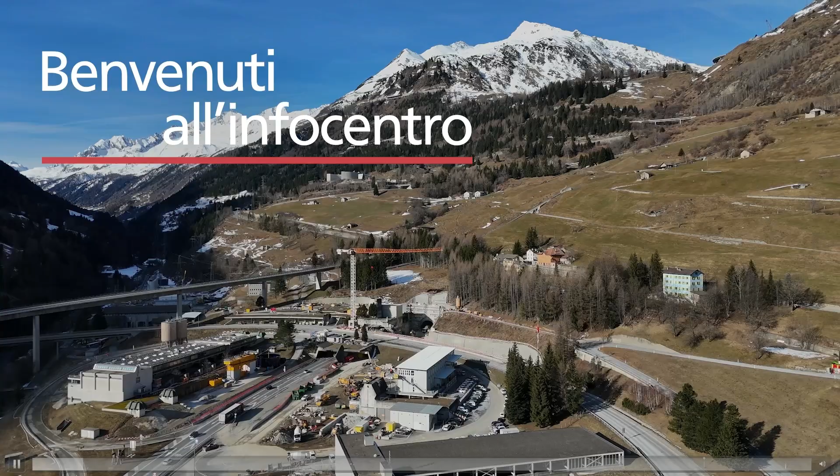Ladies and gentlemen, first of all, a few impressions of our construction sites in Göschenen and Airolo, where the second tube of the Gotthard Road tunnel is being built.

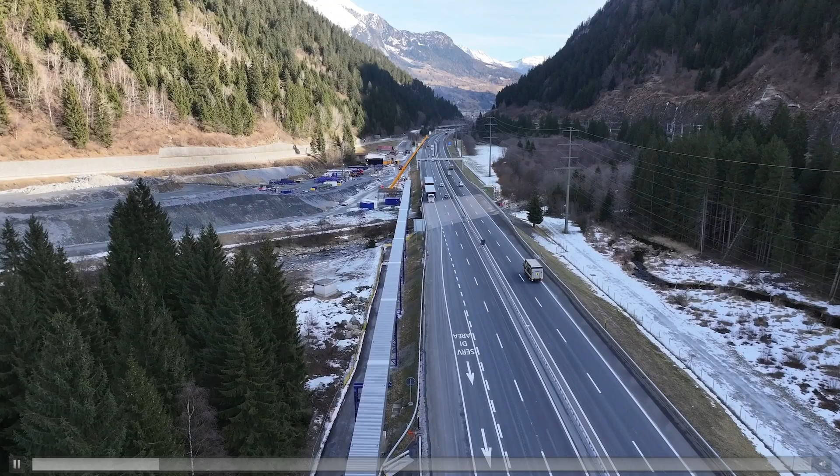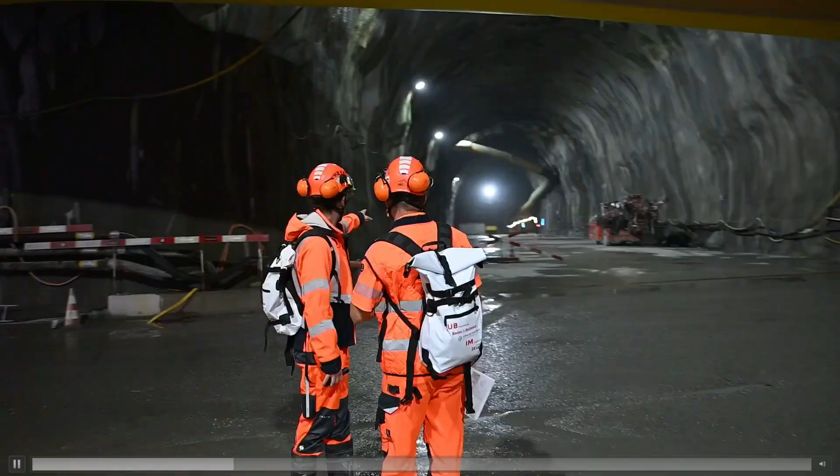Since our childhood, Alex said it, I know Alex. He went to the same high school as me. In the last years, our contact has become more intensive, and so one day Alex asked me if I would present my present tunnel project here at the Resources Day. What he didn't tell me was that I should do this in English.

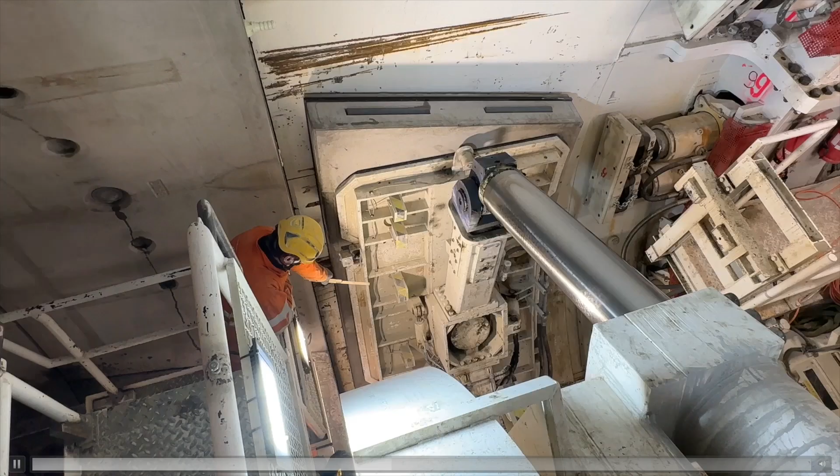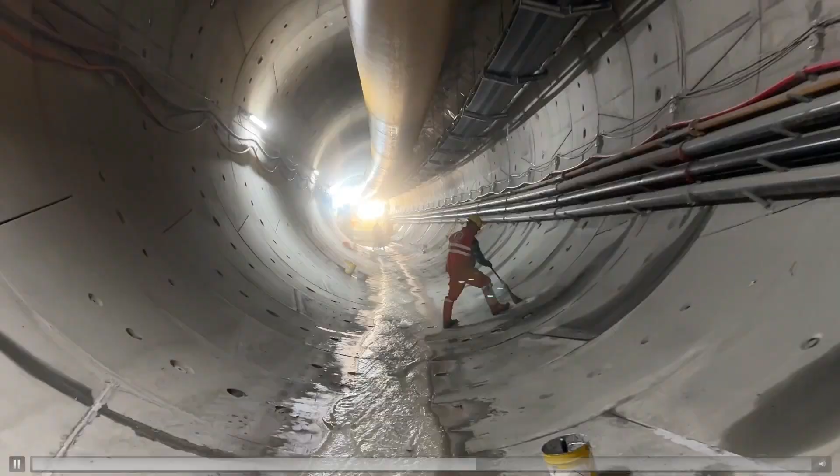You deal with stocks, with commodities, work with Excel spreadsheets all day, follow stock prices and earn a lot of money. So I decided to show you something completely different, the world of real work. Beside Excel sheets, charts and shareholders, I build infrastructure projects in a team. The best thing about my job is that we can see the progress of our work every day.

Let me shortly introduce myself. After high school, I studied civil engineering at the ETH Zürich. Since my studies, I worked for major Swiss engineering companies and was always part of the teams which built tunnels. I spoke too fast. This is Göschenen. So.

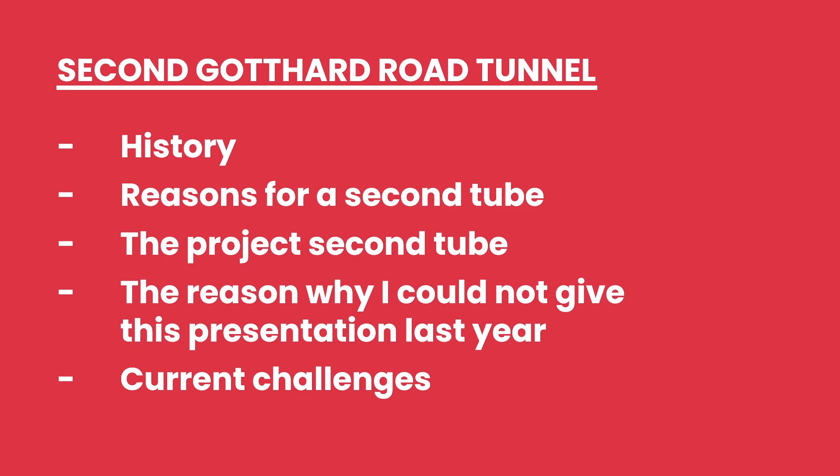Let's focus on the Gotthard and its traffic tunnels now. This is the structure of our presentation. A few words about the history of the traffic on the Gotthard route. Then the reasons for the second tube. Afterwards, I tell you something about the project second tube. Then the reasons why I could not give this presentation last year. And finally, our current challenges.

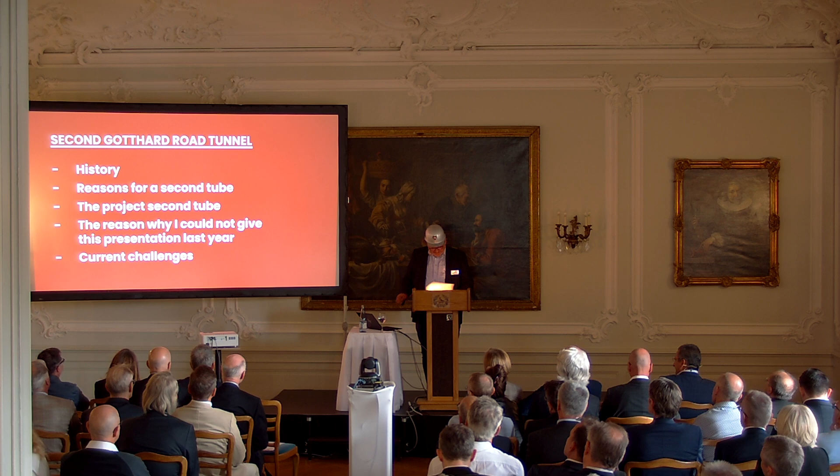As I mentioned, please excuse my poor English skills. I hope to be a better engineer than a master of English.

So back to the Gotthard. I won't tell you much about the history of the traffic over or through the Gotthard Pass. First as a mule trail, then horse-drawn carriages. You surely have already seen this iconic painting, the Gotthard Post by Rudolf Koller.

The realized project of a Transalpine rail link was significantly influenced by the politician and entrepreneur Alfred Escher. As you know, he was also the founder of the SKA, the later CS, Credit Suisse, the Swiss Re and ETH, and a lot more. A statue of him now stands on Zurich's Bahnhofplatz in front of the main station.

The work on the railway tunnel started in 1872, with the required ramps and loop tunnels between Erstfeld and Biasca being built in parallel. The breakthrough took place on 29 February 1880. The new Gotthard Railway was finally put into operation in 1882.

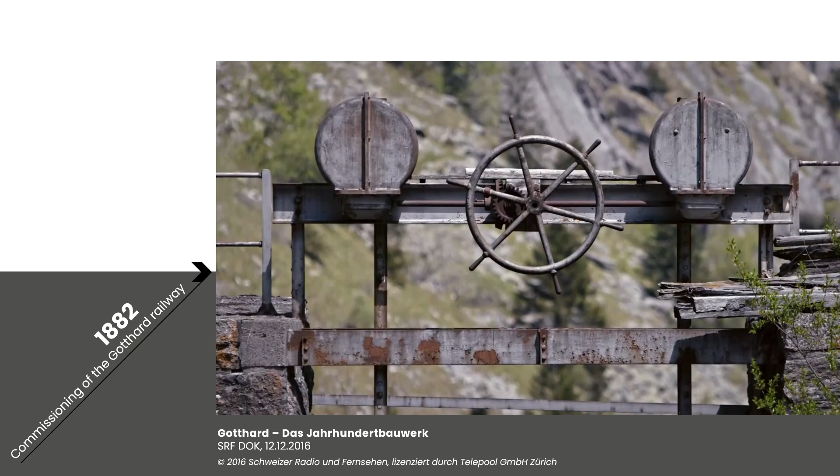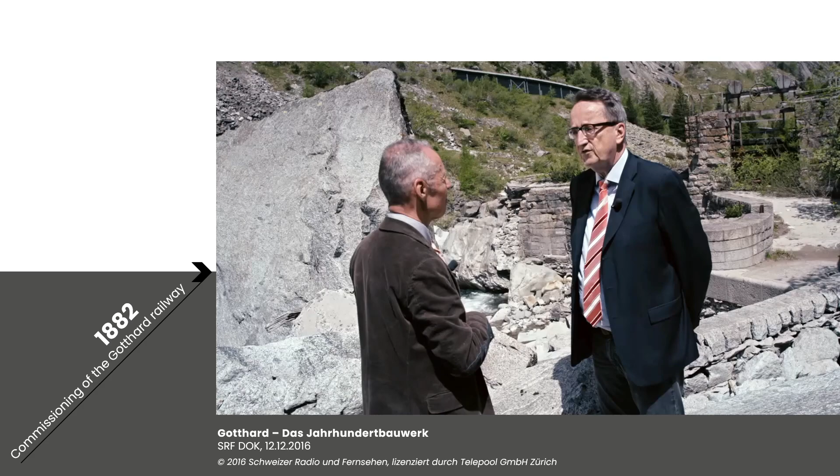The Gotthard Road Tunnel was opened in 1980. The Gotthard Road Tunnel runs from Göschenen in the canton of Uri at its northern portal to Airolo in Ticino to the south and is 16.9 kilometers in length below the St. Gotthard Pass, a major pass of the Alps.

At time of construction in 1980, it was the longest road tunnel in the world. It is currently the 5th longest. Although it is a motorway tunnel, it consists of only one bidirectional tube with 2 lanes. The Gotthard Road Tunnel provides a vital road link between northern and southern Switzerland.

Before its construction, the only direct route across the Alps was via the Gotthard Pass. The pass road culminates at 1,000 meters above the tunnel, at a height of 2,106 meters, and is only passable in summer. Due to severe weather conditions, such as heavy snowfall and avalanches, the pass is closed for about 6 months from November-December till May-June every year.

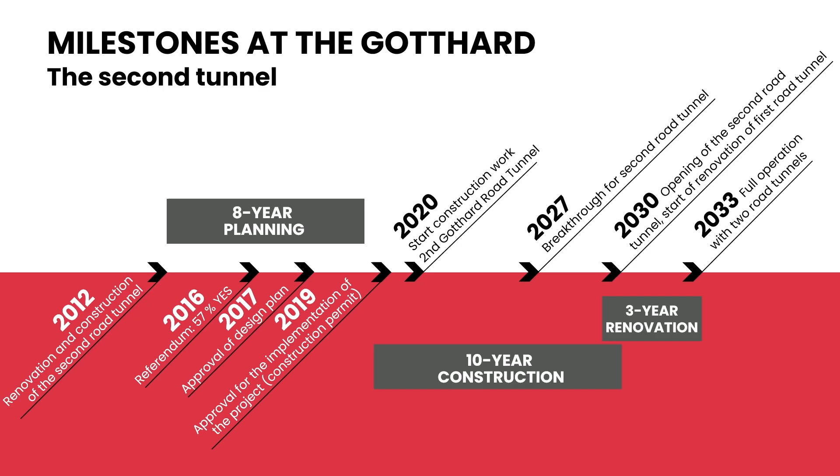After 40 years of use, the Gotthard Road Tunnel is in need of a comprehensive renovation. To ensure that the important road connection remains open during the renovation, the Federal Road Office, ASTRA, is right now building a second tunnel. It is expected to be operational from 2030. After that, the first tunnel will be renovated. Both tunnels will be available from 2033. The second tunnel will not increase the traffic capacity through the Gotthard. Only one lane will be open in each direction at all times.

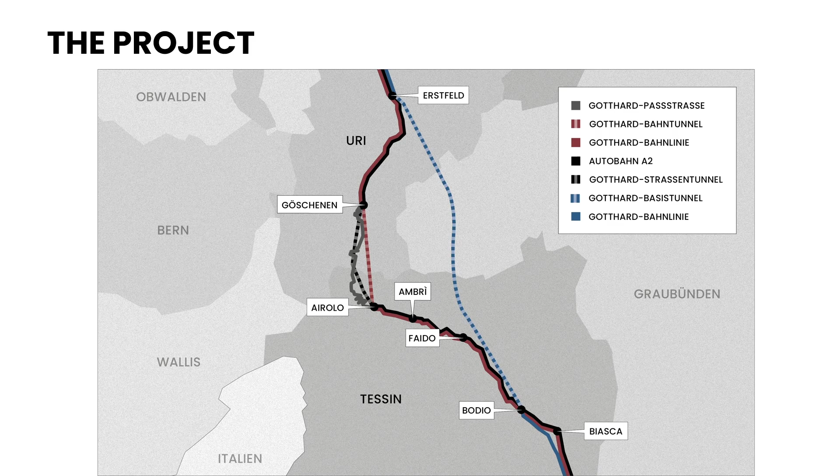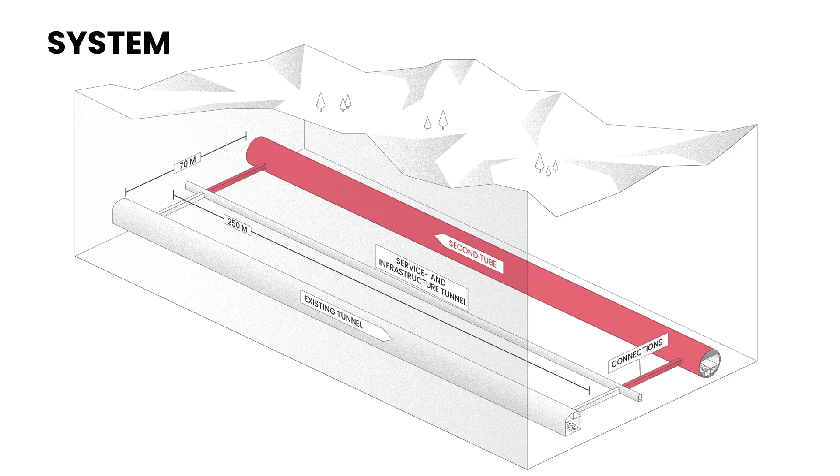The system: the second road tunnel is being built parallel to the existing road tunnel at a distance of 70 meters. Both road tunnels will be connected to the existing service and infrastructure tunnel, SISTO, which is used for maintenance purposes. Like the first road tunnel, the second road tunnel will be linked to the SISTO by 68 interconnections, each 250 meters apart.

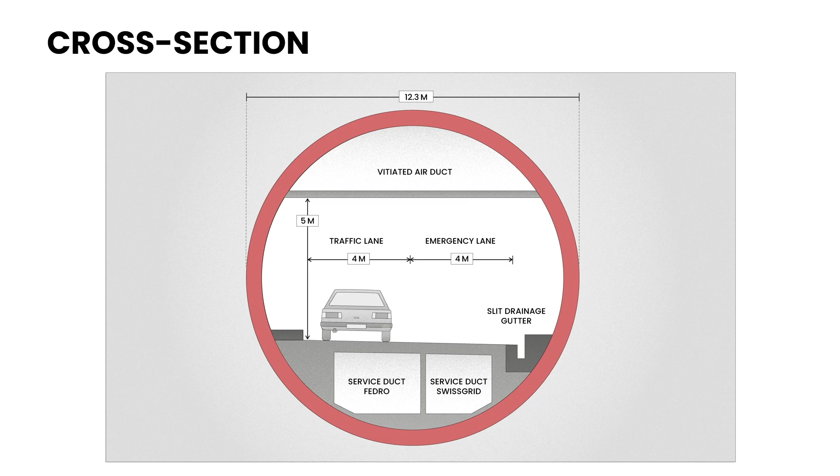The cross section. The new road tunnel will be similar to the existing road tunnel. It will have two lanes, with only the left lane being used at any one time after the first road tunnel has been renovated. The right lane in both tunnels will then serve as the hard shoulder. The service ducts situated beneath the carriageway will be different, however.

In the new road tunnel, all lines for electricity, communication and extinguishing water required for the maintenance of the tunnel will be installed in the left channel. The right channel provides space for third-party infrastructure. Swissgrid, for example, will move an ultra-high voltage line which currently runs over the Gotthard Pass into the tunnel.

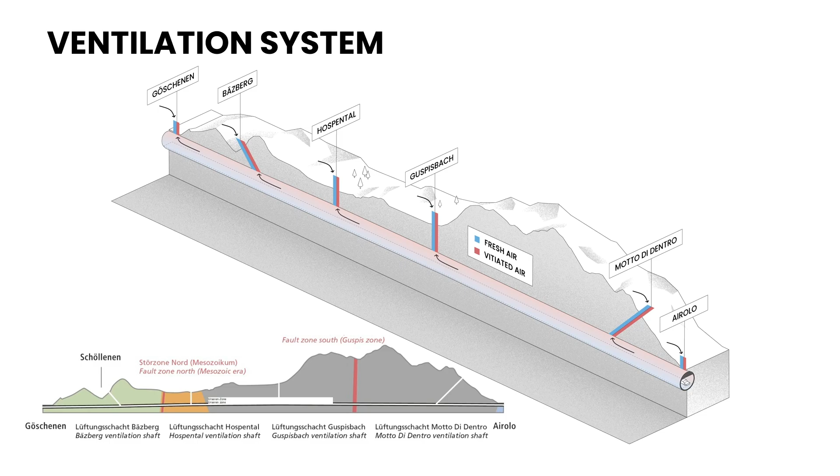Separated by a false ceiling, the ventilation duct for the removal of exhaust air is located above the road area. The duct leads to the underground ventilation centers, two of which are situated at the portals in Göschenen and Airolo, with four others distributed along the length of the tunnel and connecting to the existing ventilation shafts of the first road tunnel. In case of a fire, the fire ventilation system is activated, with smoke gases being extracted above the road area's false ceiling, making it possible to evacuate the tunnel users.

The majority of the second road tunnel will be drilled by the two TBMs, tunnel boring machines. Both the north and the south are home to an extensive geological fault zone. The northern zone is around 270 meters long and about 4.1 kilometers from the northern portal, and the southern fault zone is around 300 meters long and about 4.9 kilometers from the southern portal.

The tunnel boring machine is a single shield boring machine with a shield length of 10 meters. This is the white part in front of it. The TBM has a diameter of 12.3 meters. The drilling machine achieves up to 4.6 revolutions per minute and an average drill capacity of 2 meters per hour.

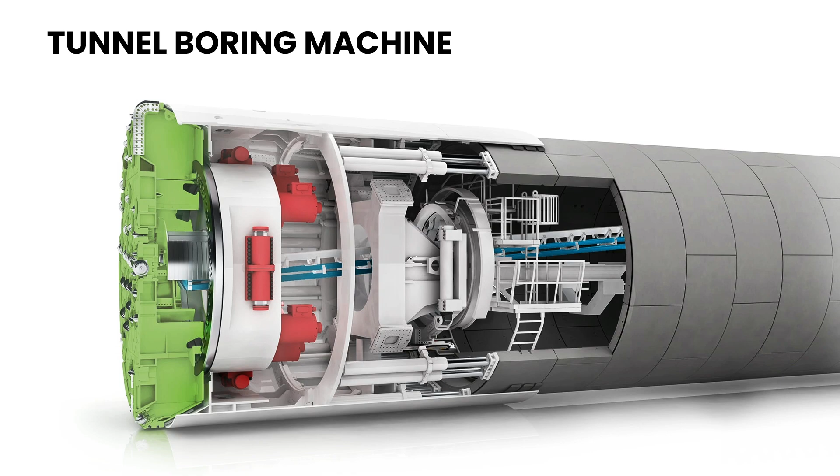One TBM will be developed from the north, with another working from the south. Launch tunnels will be built at both portals, where specialists will assemble the TBMs and prepare them for use. The fault zones cannot be drilled out by the TBMs and must therefore be blasted in advance. It is for this reason that 2 access tunnels will be drilled to these locations.

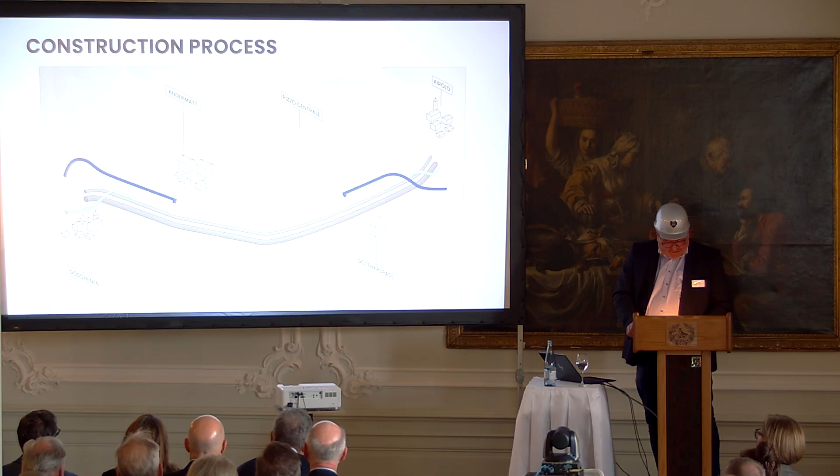The access tunnels in blue reach the 2 geological fault zones that have to be excavated by blasting before the tunnel boring machines can pass through. The heading for the main tunnel, here in red, will be delivered by 2 tunnel boring machines.

The 2 tunnel boring machines are currently being transported and assembled in front of the future tunnel. In the beginning of 2025, they will be placed in prepared launch tubes at the 2 tunnel portals where they finally start their work. They are expected to reach their destination in the summer of 2027. The breakthrough will take place pretty much in the middle of the tunnel.

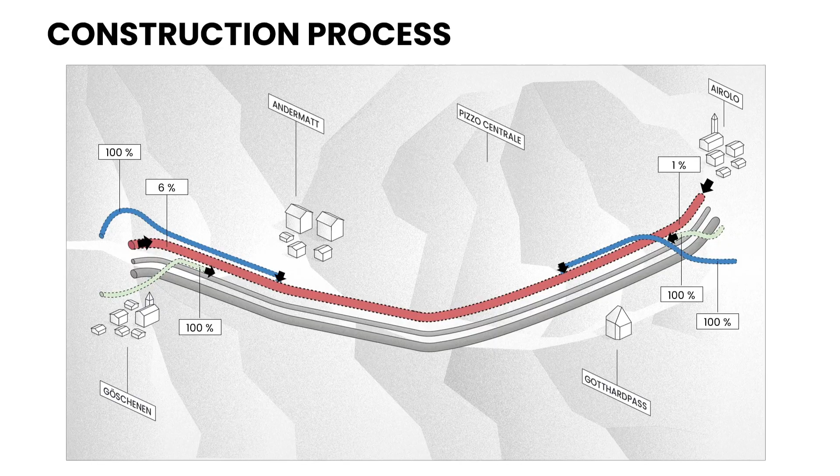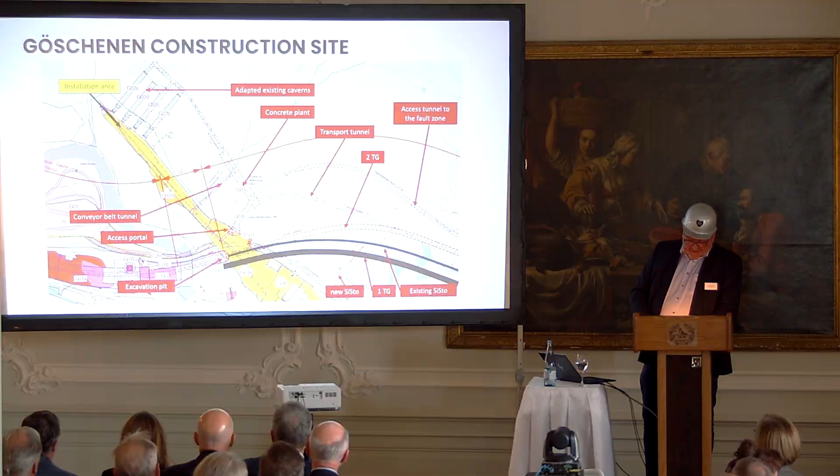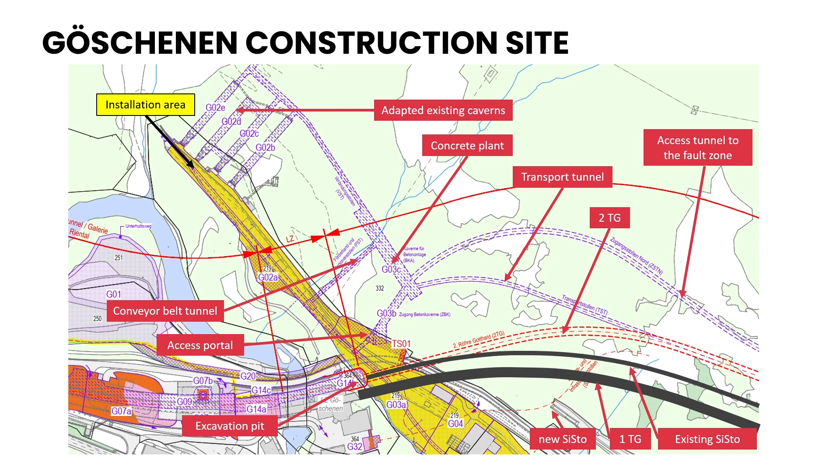On this slide, you can see the complexity of our construction site. It is impossible to explain everything to you in 20 minutes. The yellow area is our installation site. The thick black line is the existing first tube. The thin black line is the existing safety tunnel SiSto. This red line is the second tube, and all purple parts around here were only built for preparing the tunnel construction. The next slides show you some impressions of our work.

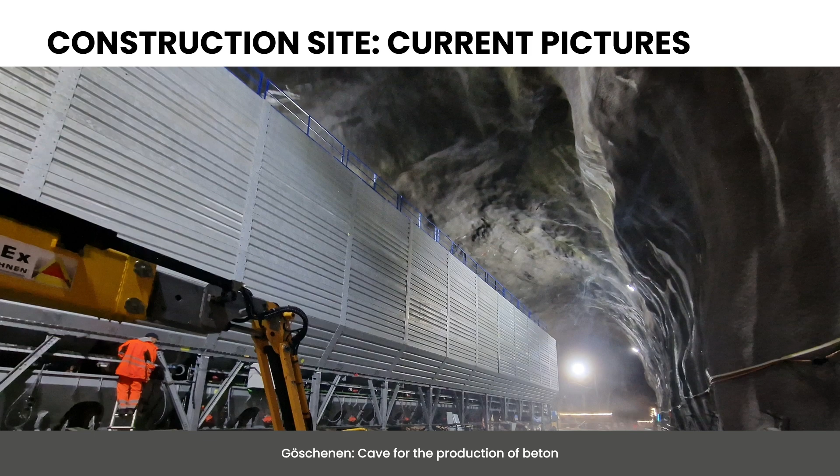Here you can see the concrete cavern. Concrete is produced here today already. The cavern is 140 meters long, 20 meters high, and 20 meters wide. The production plant is installed here. The aggregate and cement for the concrete are delivered by rail and transported from outside into the silos via the conveyor belt tunnel, which you can see here. It comes from the outside and delivers all the material.

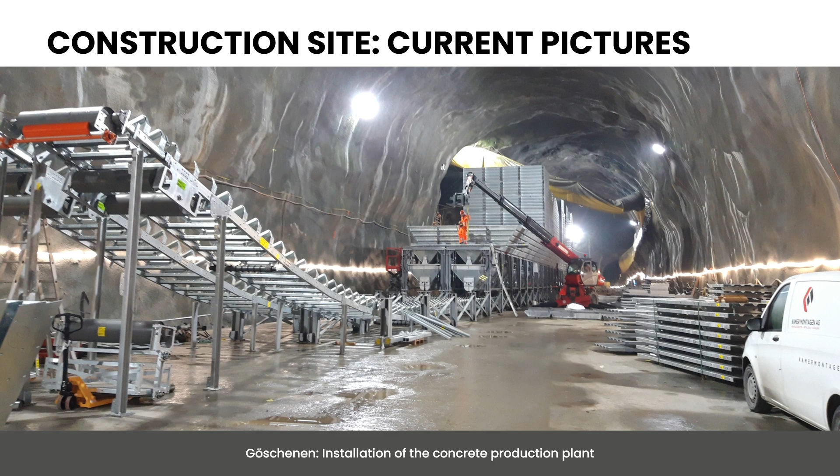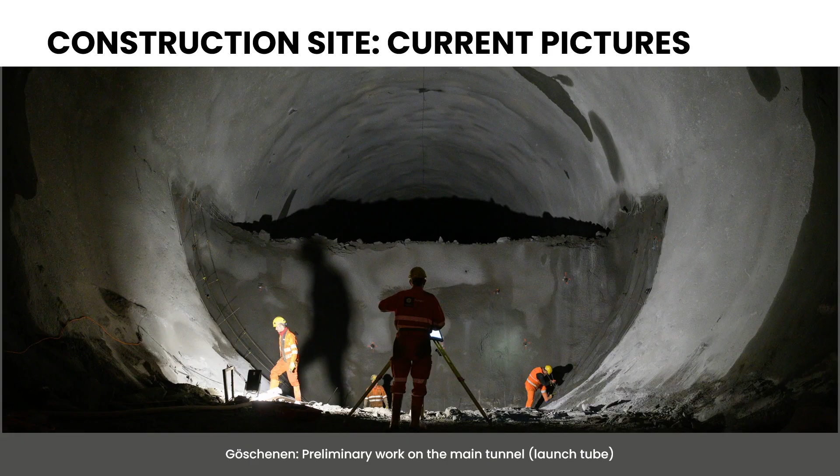In the area of the portal, we are breaking out the launch tube for the TBM. There's only little space in Göschenen, and so we have to finish assembling the TBM in the mountain. That's the launch tube.

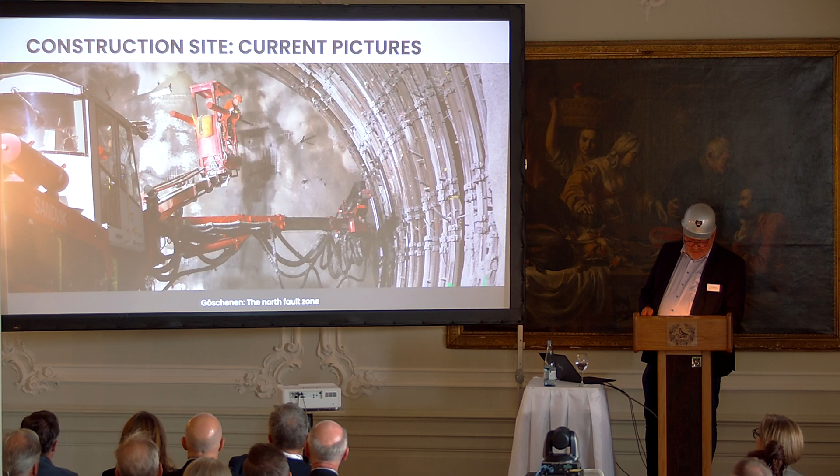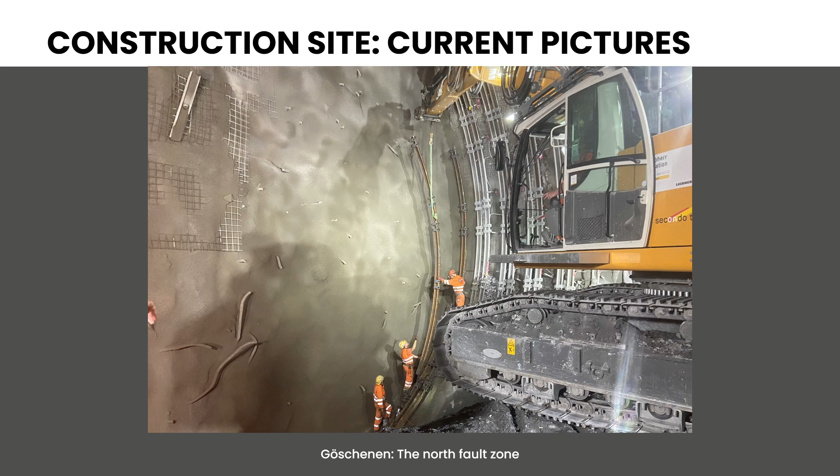2 months ago, we started excavating the fault zone. The excavation cross-section has a diameter of 15 meters. I have never seen such a large cross-section before. It's very impressive, as you can see here. The rock pressure in this zone is so strong that convergences of up to 1.4 meters can occur. And after the conventional excavation of the fault zone, the TBM, with its diameter of 12.3 meters, has to be pulled through this zone.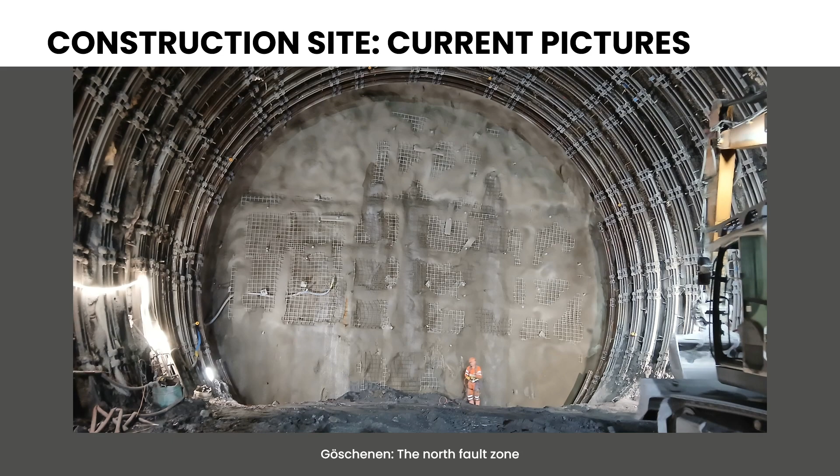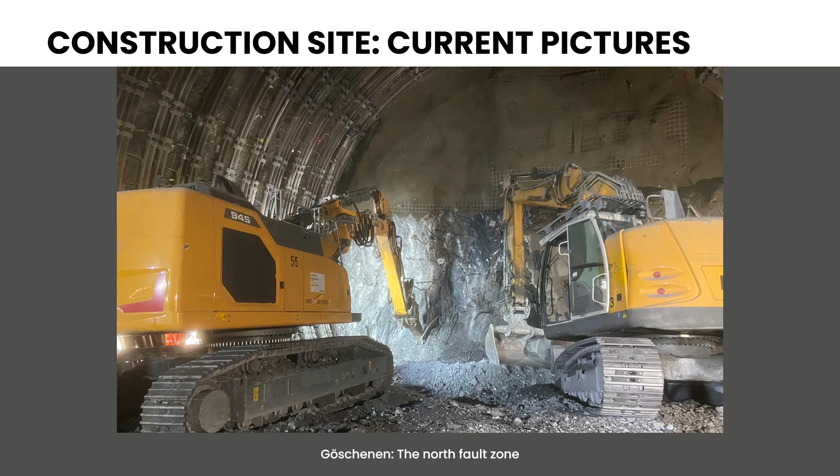The rock in the fault zone is so weak that an excavator is sufficient for the excavation. In this zone, many and strong supports made of steel and concrete are needed. Here, you don't have to blast, the excavator is enough.

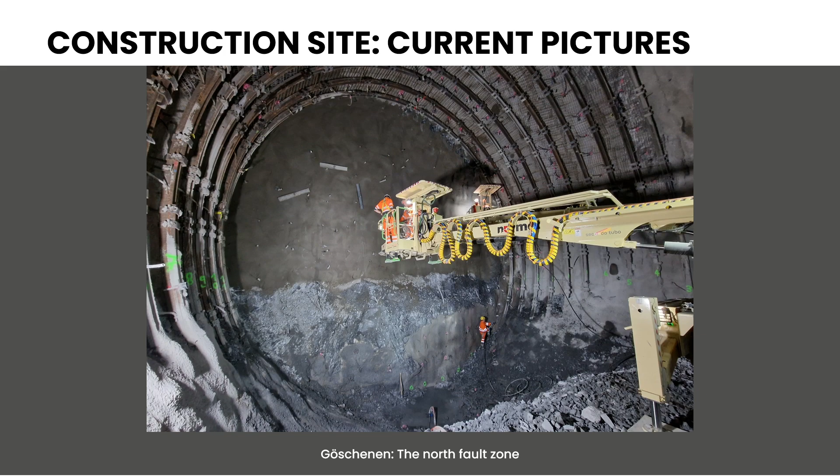It was granite. Well, it's still the fault zone. If you see the miner here, this is 15 meters, 15 meters. The altitude is so high that, as you told me, the excavator has to use a ramp because it cannot reach the top. Yeah, we have to build that in a few parts. As you saw in the video here, we open just a part of the whole area.

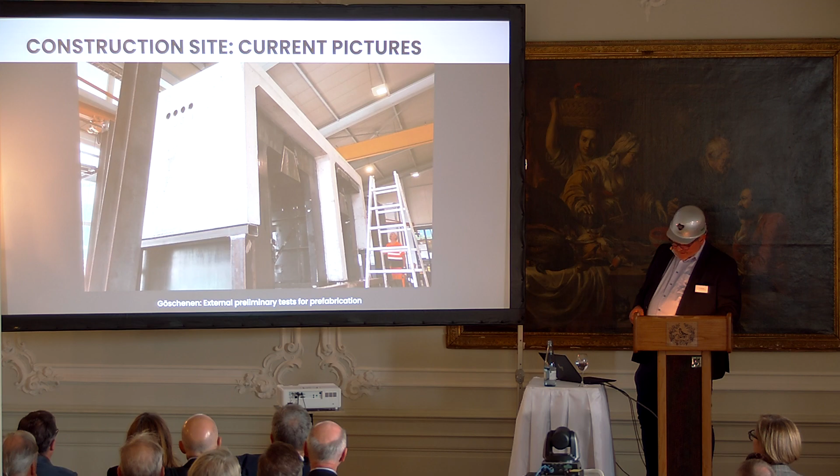We have adapted 4 old military caverns for our purposes and will use them to produce the precast concrete parts of the tunnel. The first tests have already taken place. Here you can see the excavation work for the construction pit. Much further down, the TBM will then start its work. Further down, the excavation pit had to be supported by these steel elements.

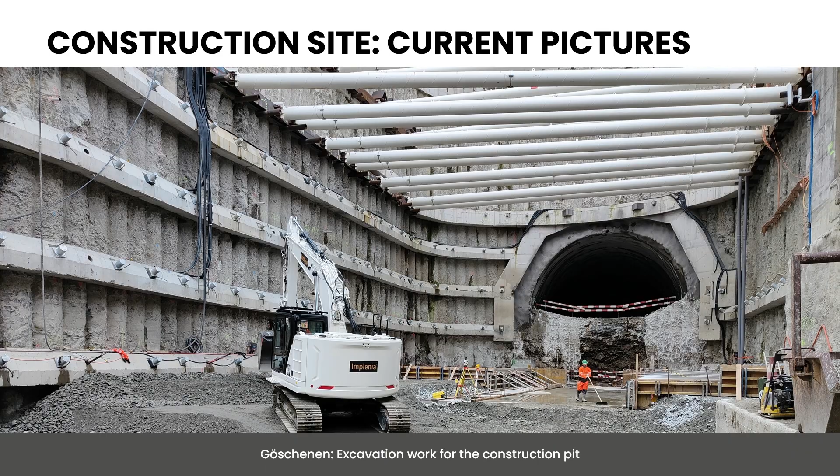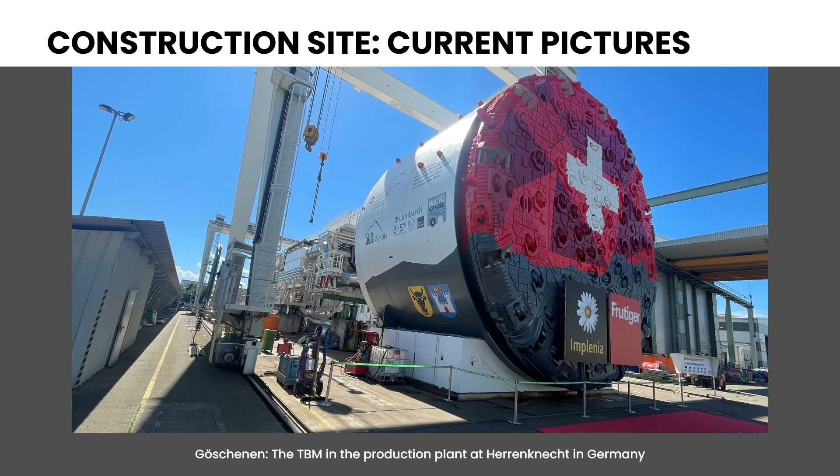Now, impressions of the production plant at Herrenknecht, where the TBM was planned and manufactured. This is in Germany, in the Schwarzwald, in Schwanau. The TBM was here to show the possibilities of the TBM, and we checked that. And after testing its capabilities, the TBM had to be dismantled again and transported to Göschenen.

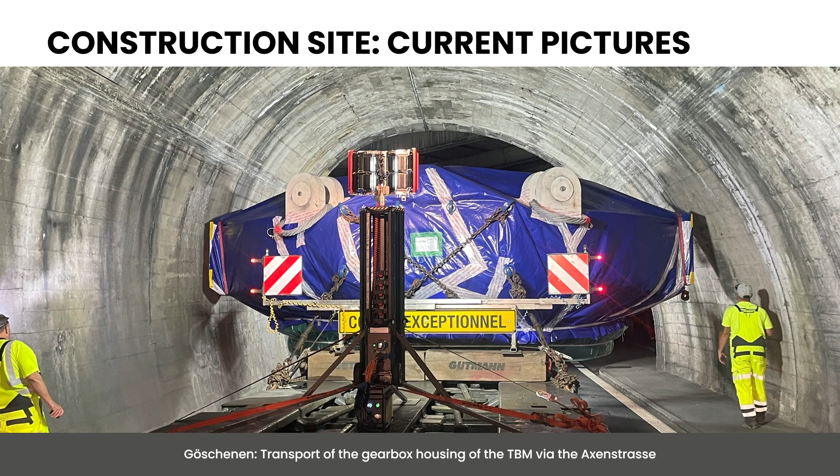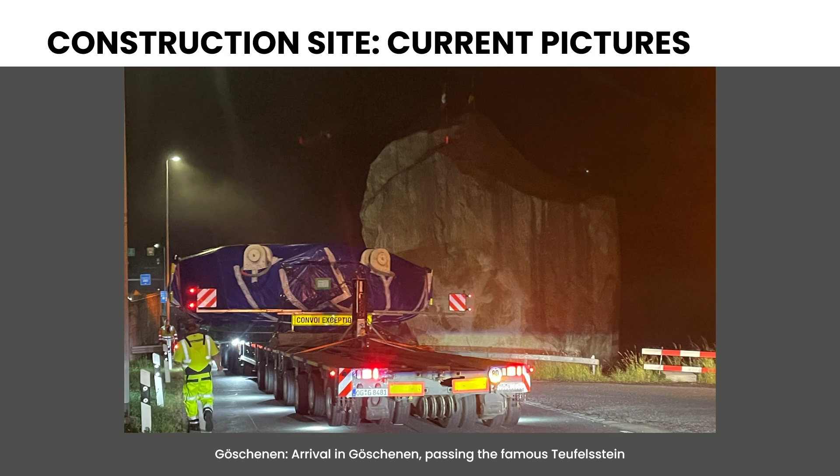On the Axenstrasse, this was challenging as well. Here you see an existing tunnel just in front of Sisikon on the Axenstrasse, and the part was 7.2 meters wide, and the tunnel was 7.35 meters. But finally, we arrived and passed the famous Teufelsstein here in the night. Right now, the drill head is being assembled and welded.

And now to the material we excavate. Around 3.5 million tons of rock material from the excavation of the second road tunnel is being transported by rail to Flüelen. Here it will be used for the renaturation of the shallow water zone at Lake Uri, which is part of Lake Lucerne.

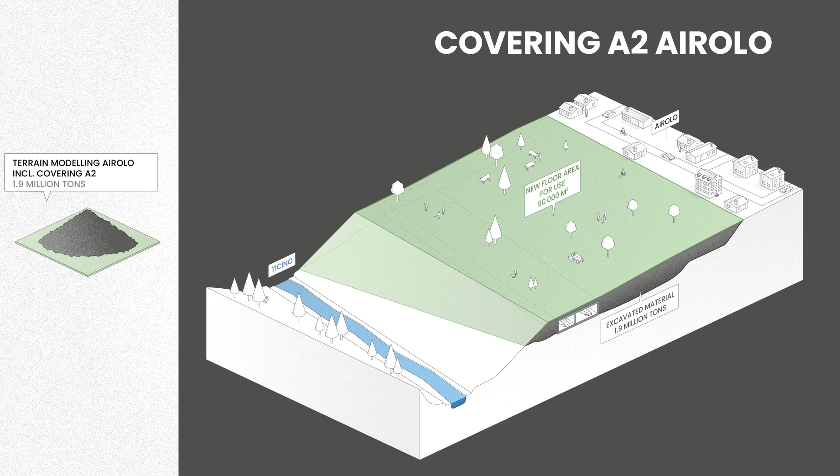We use 1.9 million tons of excavated material and construct a new motorway canopy in Airolo. Around 1.9 million tons of excavated material will be used as construct.

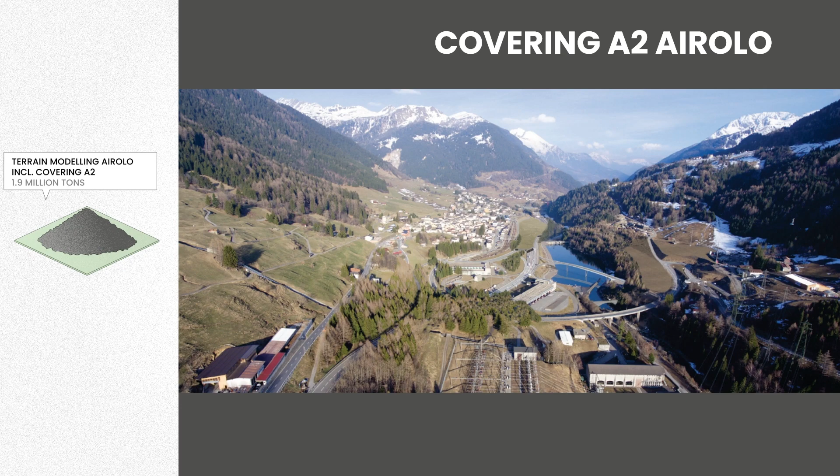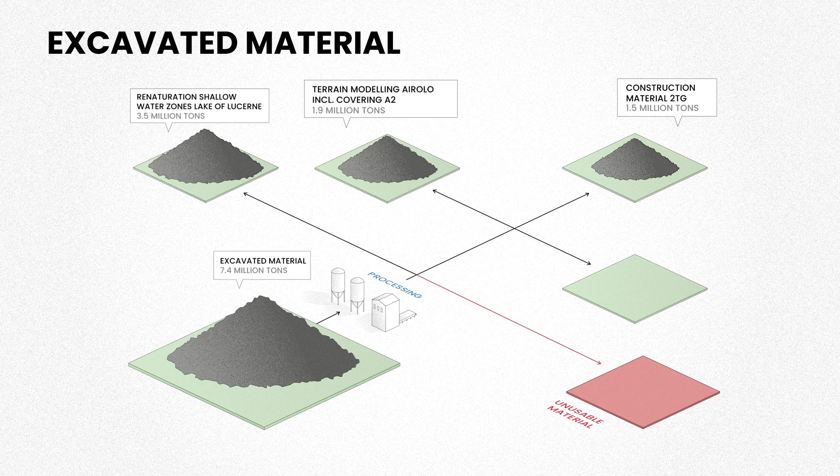This is Airolo. They will cover the A2 motorway here. And 1.8 million tons of excavated material will be used as construction material, with 1.5 million tons being used for the construction of the second road tunnel and 0.3 million tons for the renovation of the existing road tunnel. The material will be reduced in size and cleaned before being used as aggregate for concrete.

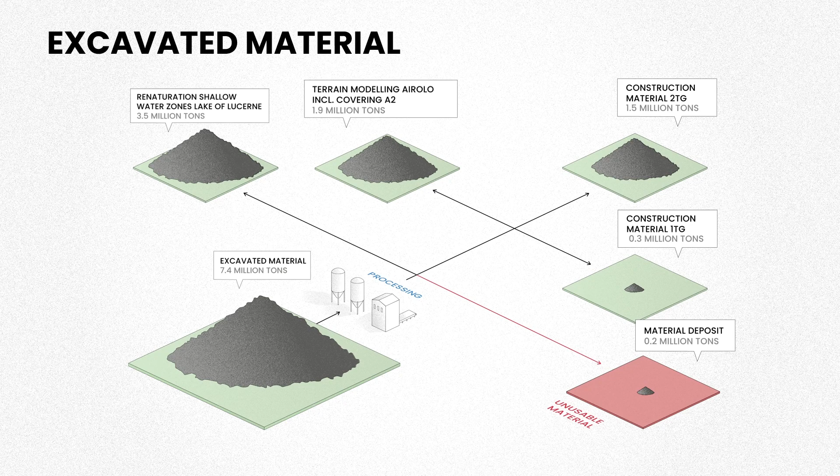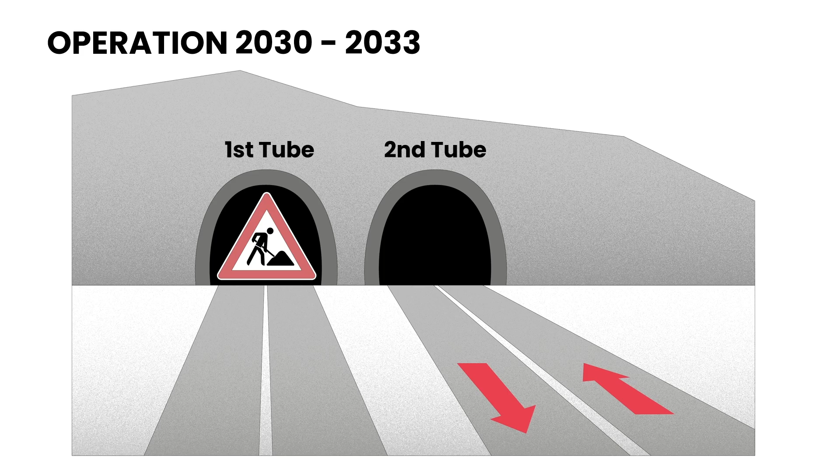The tunnel system: until the completion of the second tube, traffic will be routed completely through the first tube, as has been the case until now. This is till 2030. After the opening of the second tube, the repair of the first tube will begin. During this time, probably from 2030 to 2033, all traffic will be routed through the second tube. When the first tube is reopened, probably from 2033, traffic will be routed separately through the two tubes. The left lane in direction of travel will be used in each case, while the right lane will serve as a hard shoulder.

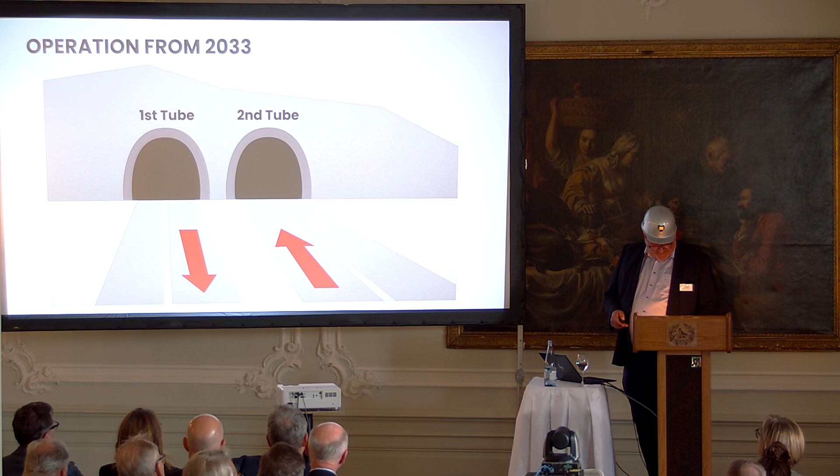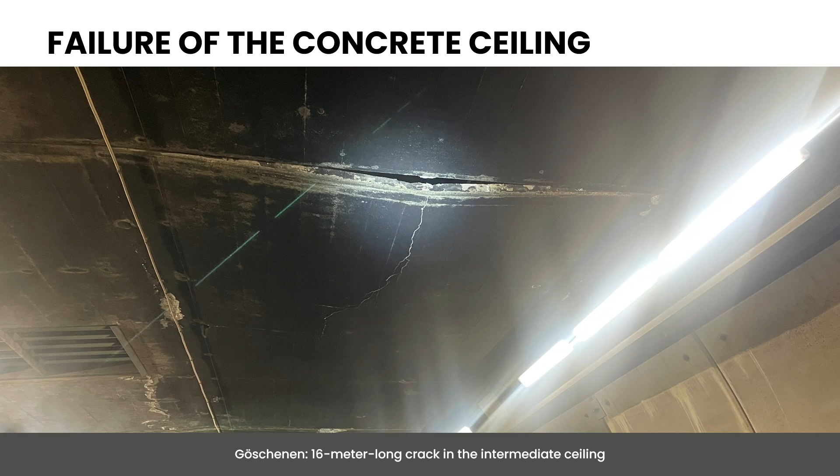The reason why I could not give this presentation last year: in the existing road tunnel, the ventilation ducts for fresh and vitiated air are separated from the traffic room by a concrete ceiling. On Sunday, September 10th, 2023, the Uri Cantonal Police received a report that concrete parts had come loose from the ceiling of the Gotthard Road Tunnel and fallen onto the roadway. During an initial inventory, the Federal Roads Office discovered a 16-meter-long crack in the intermediate ceiling near the North Tunnel portal that had caused the damage. No one was injured in the accident. To protect road users, ASTRA closed the tunnel in both directions immediately.

Already during the night and the next morning, we were confronted with the following questions: What had happened? What has to be done? When will the tunnel be reopened? At the same time, Federal Councillor Rösti told the press that the tunnel would be open again next weekend.

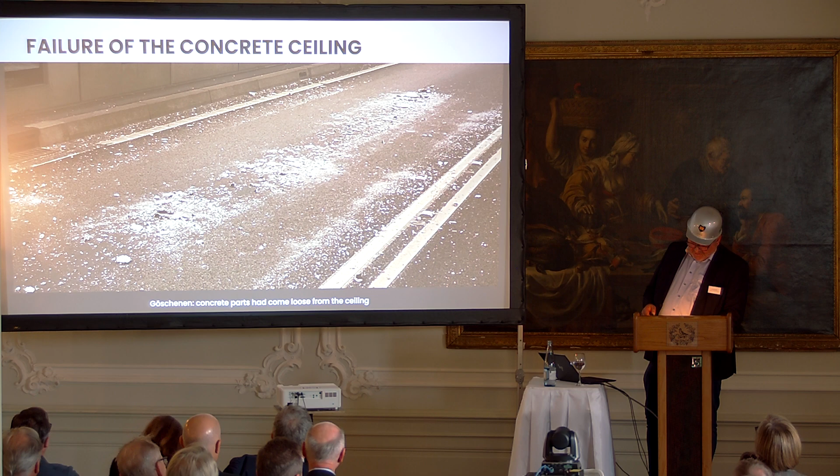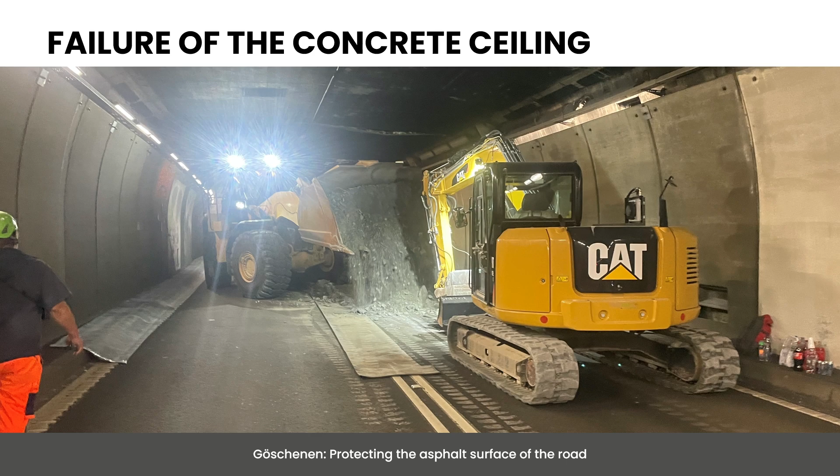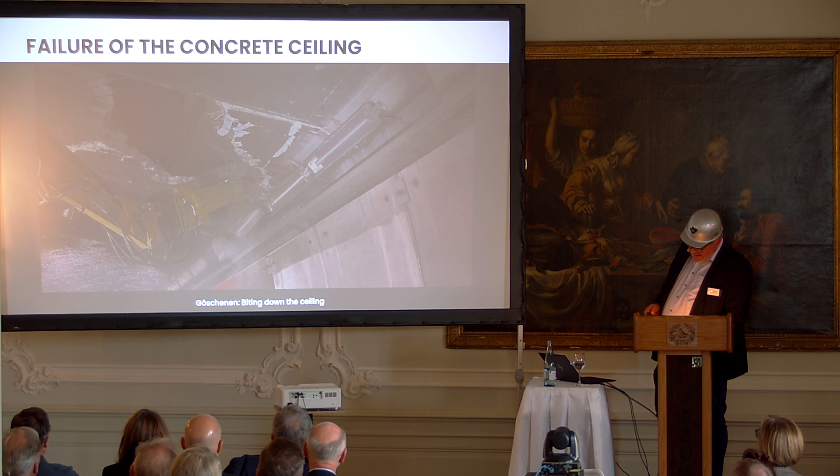The defective ceiling in the Gotthard Road Tunnel had to be broken down. With heavy installations, we did that. We had to protect the asphalt surface of the road because the concrete parts of the ceiling fall down. Biting down the ceiling. And after one night, the whole ceiling was down. You see here the duct for the fresh air and the duct for the used air, with 40 years of pollution from traffic.

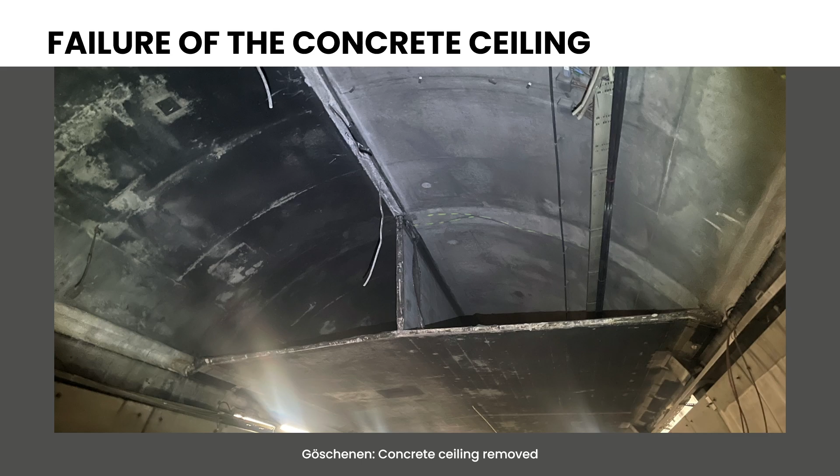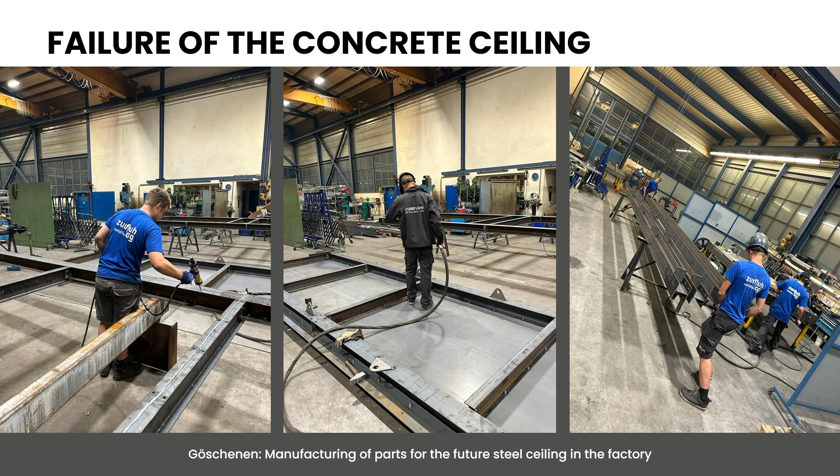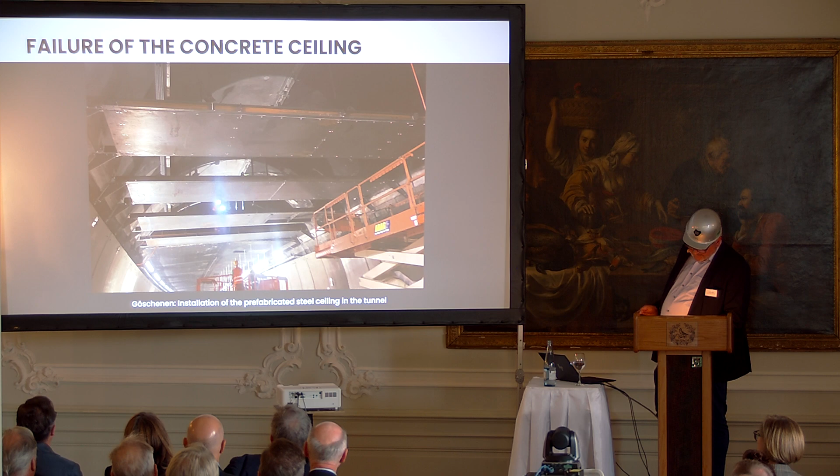After that, in parallel, they created a steel construction, which had to be planned and manufactured first. And afterward, it was installed in these 16 meters. They worked 5 days, 24 hours without any sleep. Me as well.

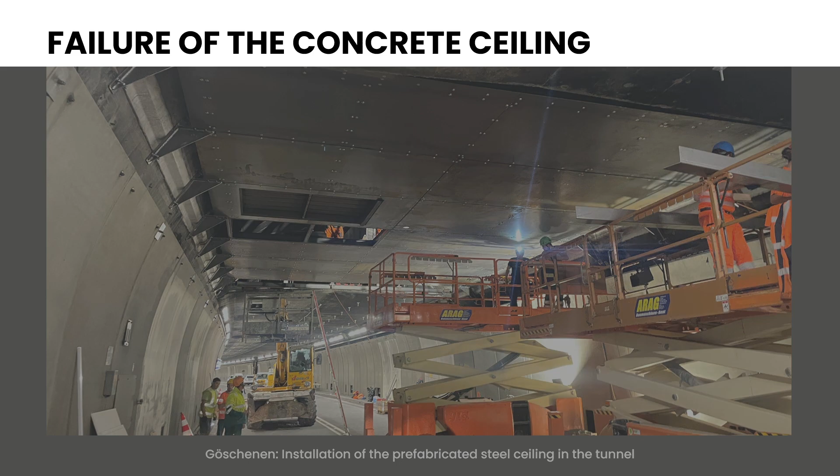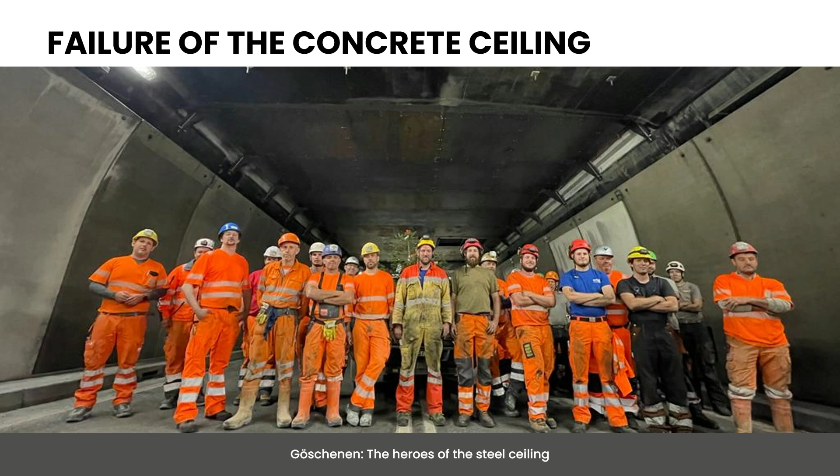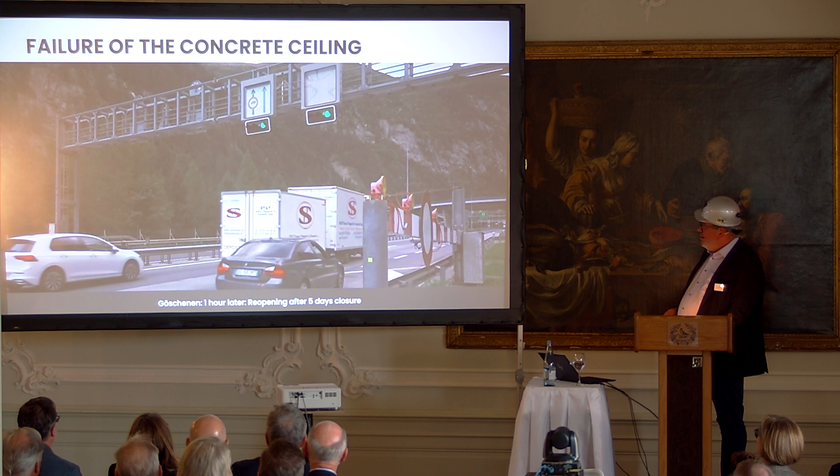These are the heroes of the steel ceiling. No time to sleep. And after that week, there was the road to be cleaned. And 1 hour later, we reopened the tunnel after days of closure. By the way, Federal Councillor Rösti was right. The tunnel was reopened on Friday evening.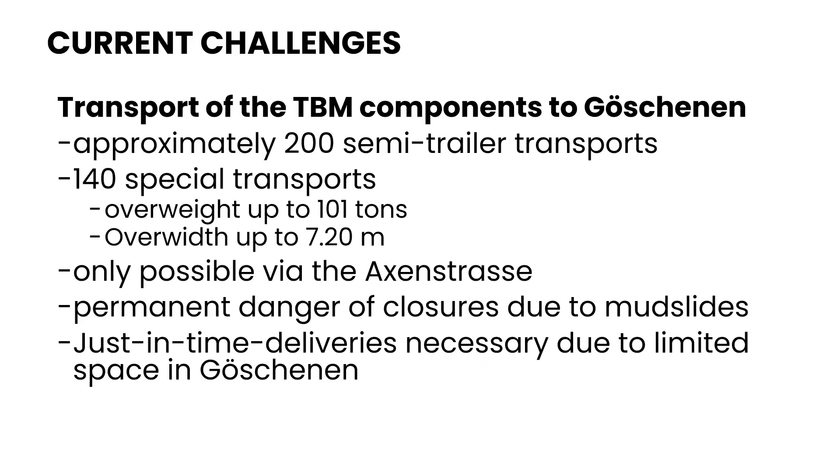I will tell you about current challenges. The transfer of the TBM components to Göschenen is a challenge. Approximately 200 semi-trailer transports are to be done. 140 of them are special transports with overweight up to 101 tons and oversize up to 7.2 meters. The only way is to use the Axenstrasse. The Seelisberg route isn't possible because of a bridge which isn't built for these weights.

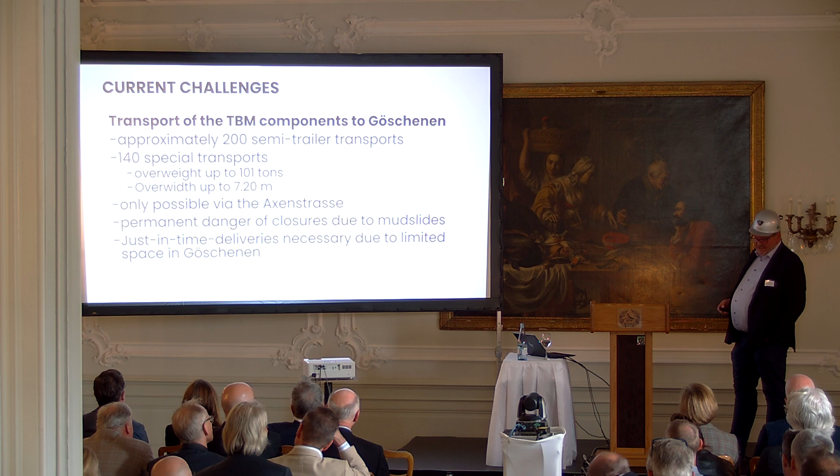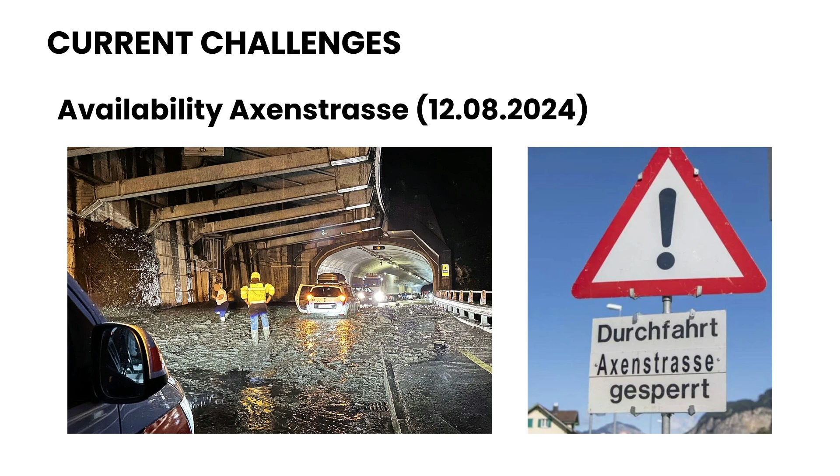Permanent danger of closure due to the mudslides on the Axenstrasse. We need just-in-time deliveries because we have limited space in Göschenen. We can't store the parts. And we started the transports on the Axenstrasse on 9 August 2024. And 4 days later, we had this mudslide here, and the Axenstrasse was closed. So the whole process is in danger. We even started transport on the waterway from Brunnen to Flüelen. But now the Axenstrasse is open again.

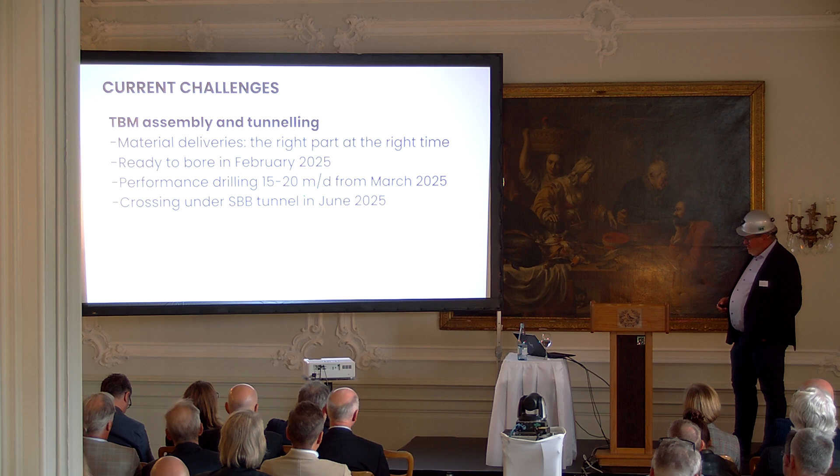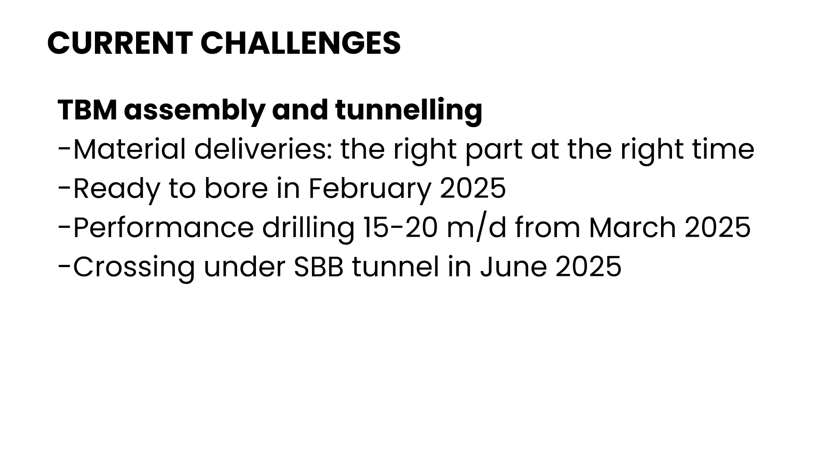Current challenge is also the assembling and tunneling of the TBM. The material deliveries: the right part has always to be at the right time on the construction site. We want to be ready to bore next February. The performance drilling with about 15 to 20 meters a day is planned from March next year. And in June, we undercross the SBB tunnel, the old 140-year-old tunnel, with a distance of 5 meters.

The fault zone, I told you, the main challenge here is the occupational safety for all the miners there. And the question if the rock deformations are smaller than the calculated deformations. I told you, 1.4 meters we expect. And is the excavation of the fault zone completed when the TBM reaches this zone? The TBM has approximately 1 year to reach this zone, and we have, I hope, less than 1 year to excavate the fault zone.

You are surely interested in the costs of that construction. In whole, it will be about 2 billion. Francs, Swiss francs. In dollars, it would be more. Glück auf, that is what miners say to each other when they go in the tunnel. Glück auf means good luck. I thank you for your attention.